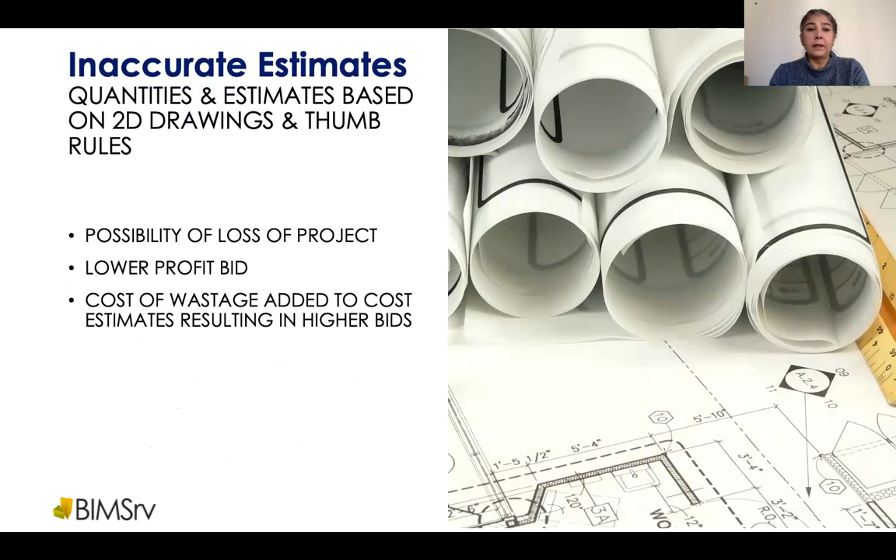So inaccurate estimates is another area which is one of the main causes and which causes wastage and time delays. There would be lower profit bid. Then construction delays typically are caused by inaccurate cash flow estimates, and then there are delays in procurement.

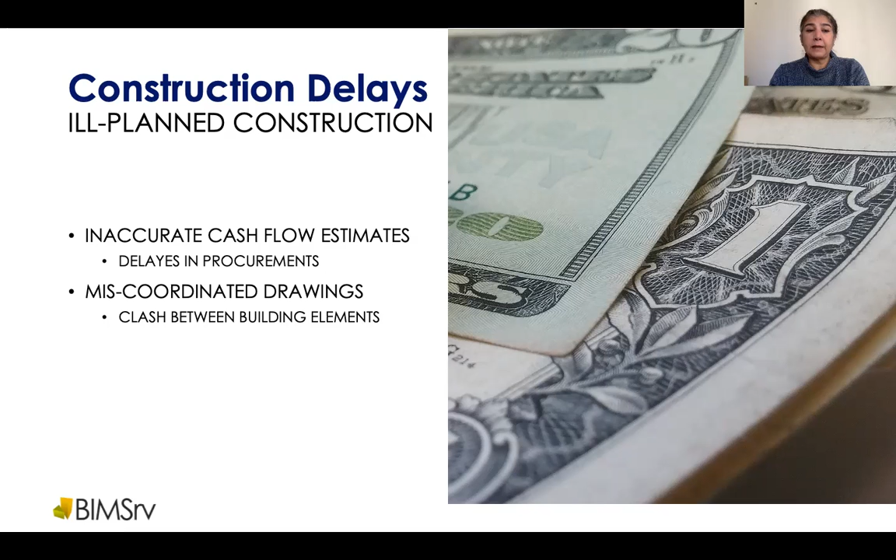There would be miscoordinated drawings. Very important aspect is clash between different building elements, and we all know how much everybody has to be present at the site. It involves major site involvement, trying to resolve these clashes at site.

So BIM is a solution that helps to achieve greater efficiency and also improves bottom line. It creates very accurate and verifiable quantity takeoffs, of course with the caveat that the BIM model is well prepared and well coordinated. You get the most accurate estimates.

It provides opportunity for lowest possible bids. It provides for accurately planned cash flows. There is early detection and resolution of clashes at the pre-construction stage itself. And all of this would go for a better project, better client confidence, and improved bottom lines.

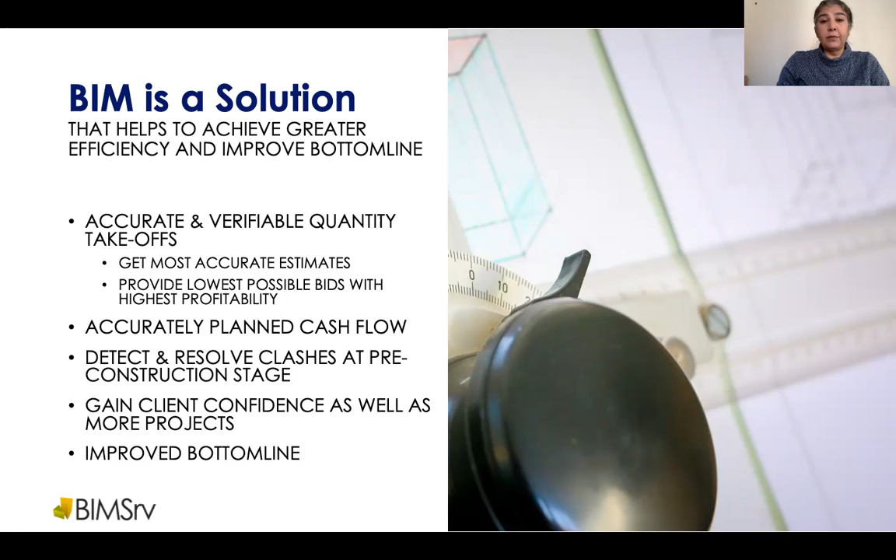So what is BIM? BIM, or Building Information Modeling, is a process for creating and managing information on a construction project across the entire project life cycle. One of the key outputs of this process is the building information model, which is a digital description of every aspect of the built asset.

So this model draws on information assembled collaboratively between the designers, architects, engineers, MEP consultants, all of the role players. And this is updated at key stages of a project.

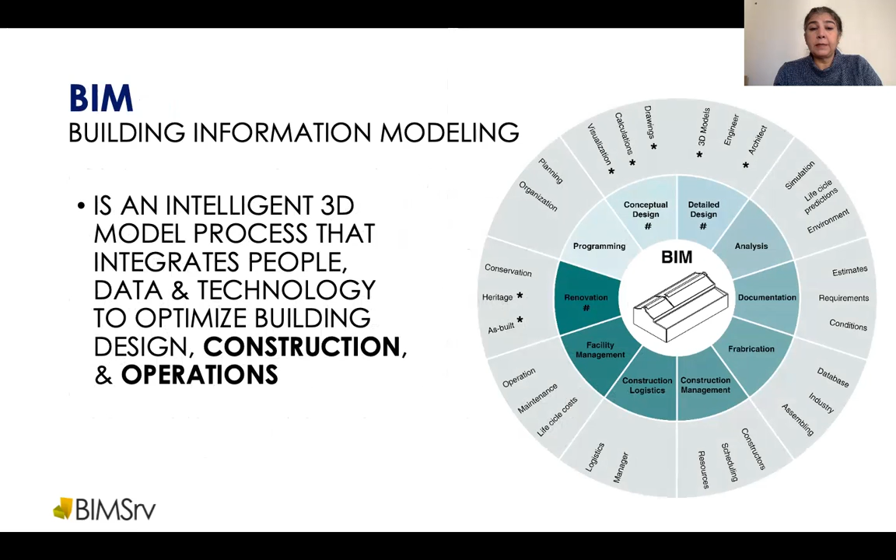So typically we can say that BIM is an intelligent 3D model process that integrates people, data, and technology to optimize building design, construction, and operations.

So what is the kind of information that goes into the model? A BIM object is a combination of many things: product properties such as thermal performance, could be the structural capacity, the geometry representation of the product's physical characteristics, visualizing data, giving the object a very recognizable shape.

Then there's functional data such as detection zones that enable the object to be positioned and behave in the same manner as the product itself. So it's an entire simulation of the building.

And also various plugins integrate several other outputs which you can generate from BIM models. There can be specifications, operating schedules - all of those input outputs can be obtained from BIM modeling.

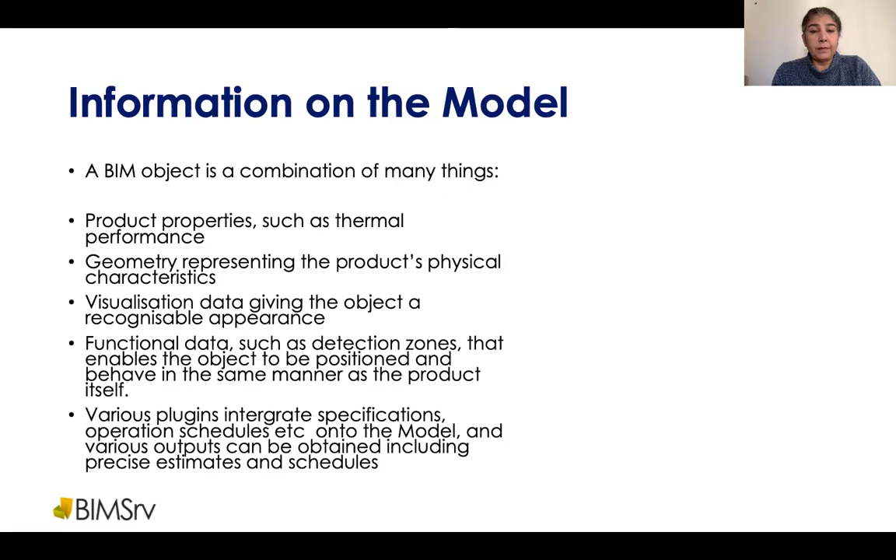So these are intelligent 3D models, unlike presentation 3D models. This is real life building elements such as walls, floors, doors, ducts, pipes, etc. used to build the model on a computer.

A multidisciplinary model is used to detect clashes between the elements. That means all the MEP, structure, architectural elements are already pre-designed and visualized in a three-dimensional model and resolved even before the start of construction on site.

The building elements in the 3D model have dimensional and physical properties that can be quantified and extracted. That means each element, let's say if it has thermal properties, then we can see the behavior of the entire building in response to different climate. We can see its total energy consumption. All these may, of course, require certain plugins.

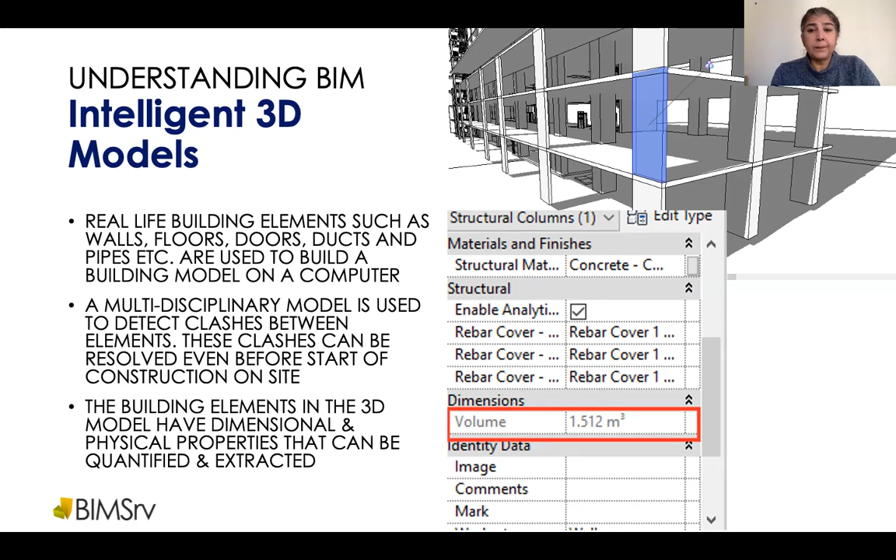So in BIM, typically there are LODs or level of development. And therefore a BIM model can be made to different levels of detail. The basic level of detail at initial stages, from LOD 100 to 300, is typically used by designers such as architects, engineers.

And LOD 300 to 400 is more applicable for the construction agencies themselves. And LOD 500 then is as-built and highly detailed, and also used by facility managers for even managing their facility schedules.

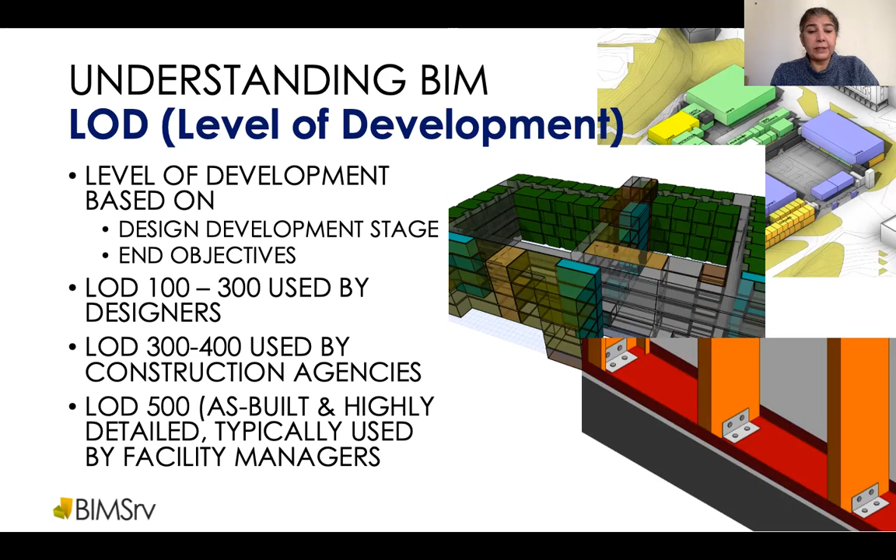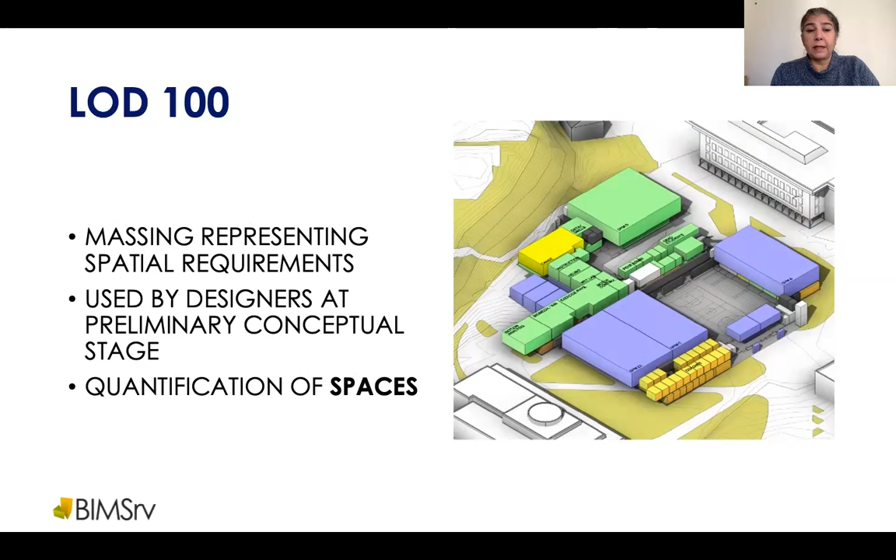Here are just some examples to familiarize what LOD 100 would be like. That represents basic massing and quantification of spaces. It is used by designers at the preliminary conceptual phase.

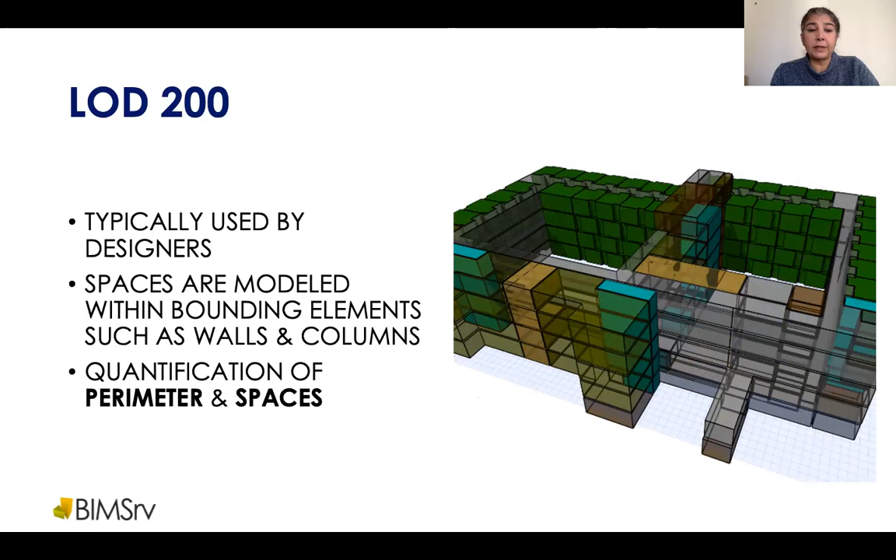Then at LOD 200, also used by designers, spaces are modeled within bounding elements. So elements start getting defined as walls and columns, and the quantification of perimeters and spaces happens at this stage.

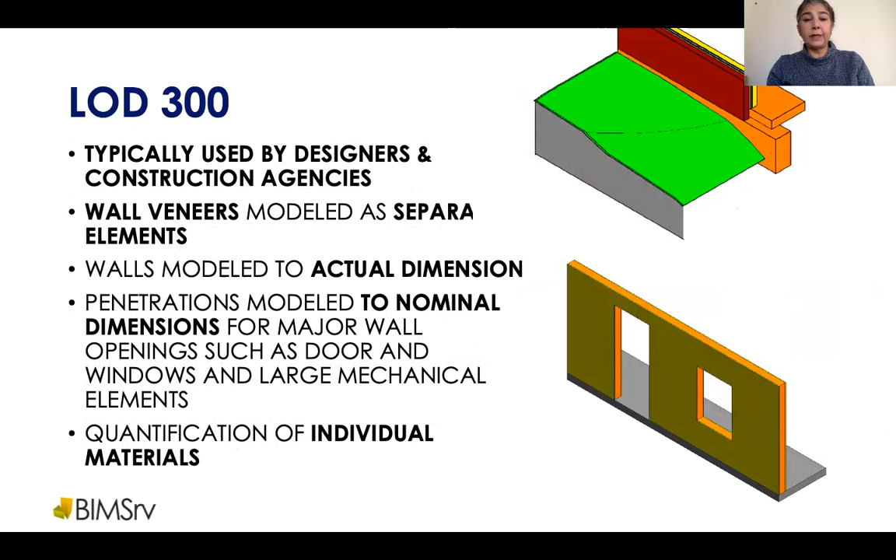LOD 300 typically is used by construction agencies. The wall veneers are modeled as separate elements. The walls are modeled to actual dimensions, and even the penetrations are modeled to nominal dimensions. The quantification of individual materials is possible at this stage.

LOD 350 is typically used by designers and construction agencies, and it would start involving the level of GFC drawings. So wall framings are modeled, the support structures would be modeled, all penetrations are modeled. In this example, we can see the elements that are in red. Those would get defined and then they cannot be cut easily for coordination with MEP elements.

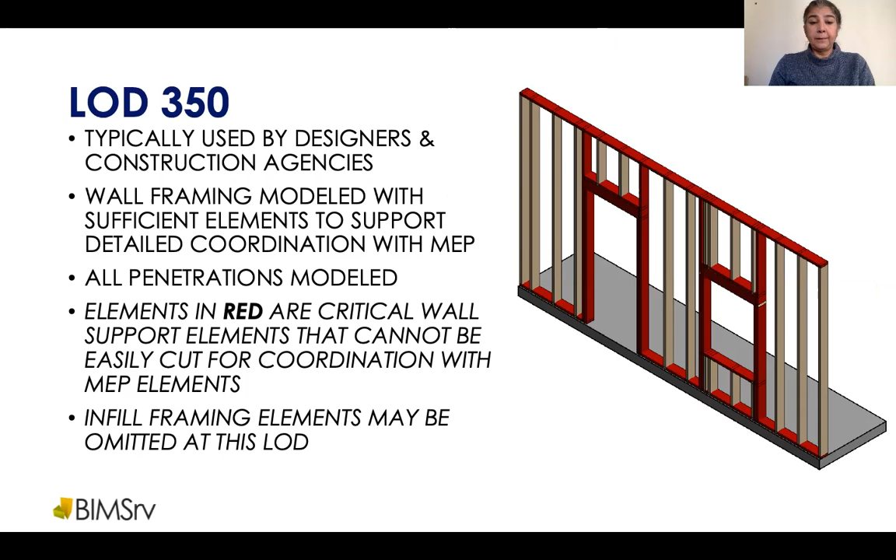LOD 400 is typically used by construction agencies. The entire wall framing is modeled to support the fabrication. At this stage, the fabrication details, outputs, elements, materials, quantification could be obtained easily. Connecting elements are modeled, including but not limited to fasteners, clips, other hardware. Detailed quantification will include up to the extent of the fasteners required.

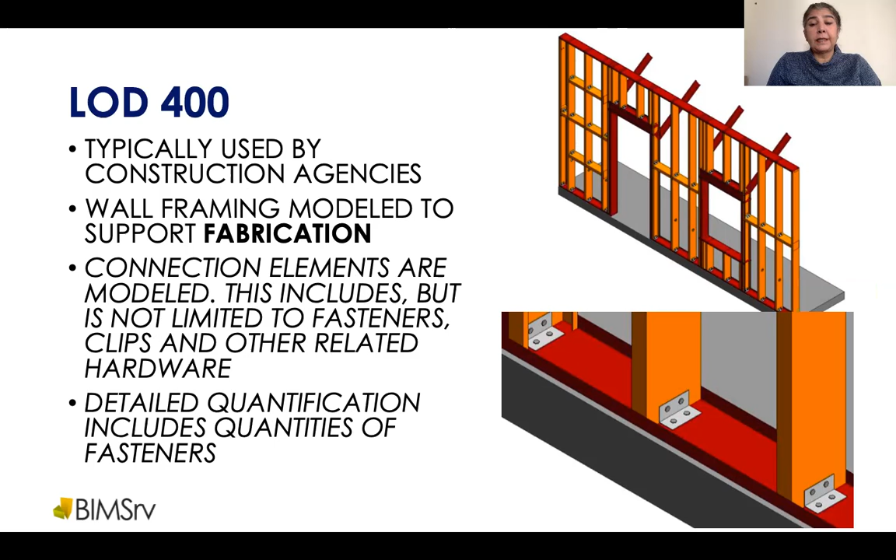So what are the benefits of BIM? Of course, BIM itself is a highly detailed topic, and anybody interested would obviously take it further, which we can discuss or Ashit could discuss.

BIM basically brings together all of the information about every component of a building in one place. It makes it possible for anyone to access that information for any purpose. That single model could also be shared, and it helps to integrate different aspects of the design more effectively. In this way, the risk of mistakes or discrepancies is reduced and abortive costs are minimized.

BIM data can also be used to illustrate the entire building life cycle from cradle to grave, from inception to design, and to demolition, including materials reuse. Spaces, systems, products, and sequences can be shown in relative scale to each other and in turn relative to the entire project.

So we can see what high level of efficiency can be there, and here we can begin to see the link with sustainability. By signaling conflict detection, BIM prevents errors creeping in at the various stages of development or construction.

Let's look at BIM and sustainable construction. In the Lafarge Holcim Foundation article, sustainable construction is defined as involving issues such as the design and management of buildings, materials performance, construction technology and processes, and energy and resource efficiency in the building.

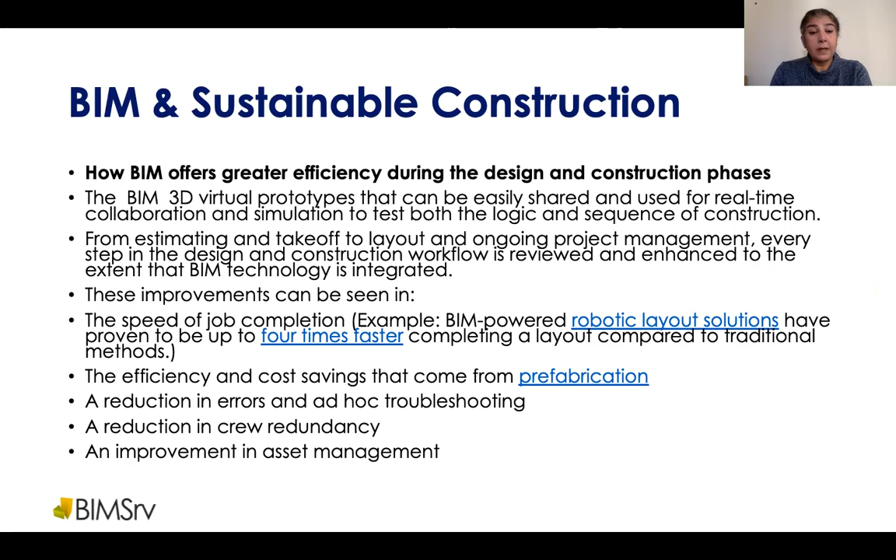These improvements can be seen in speed of job completion, the efficiency and cost saving that come from prefabrication, a reduction in errors and ad hoc troubleshooting, a reduction in crew redundancy, and an improvement in asset management.

What about BIM in the COVID era? Here I quote from an article in World Economic Forum by Fan Yulin, saying, here's how smart construction could transform home building after COVID-19.

He states, the construction sector is already using building information modeling. During the COVID-19 lockdown, BIM was more widely adopted in the industry. It enabled projects to continue in a digital and virtual environment, even when the participants were unable to meet in person. This collaborative approach allows data to be shared across professional disciplines and businesses and facilitates smarter construction.

Especially in the prefab industry, the data can be fed into manufacturing processes for components and modules that are later put together to form finished buildings.

The same article goes on to state that the future of the construction industry is digital, and BIM is the future of design and long-term facility management. It is driven by technology and clear processes, and it is implementing change across all industries.

As hardware, software, and cloud applications herald greater capability to handle increasing amounts of raw data and information, use of BIM will become even more pronounced than it is in current projects.